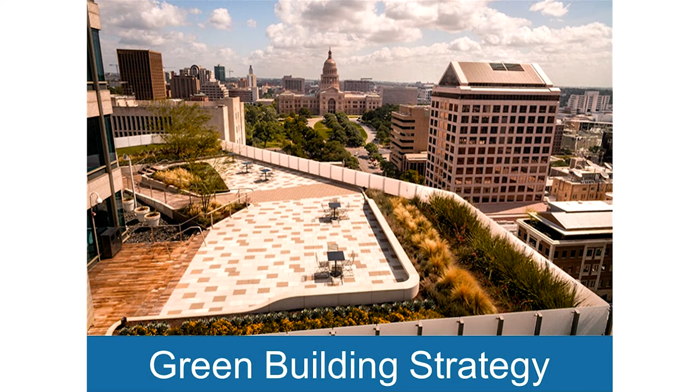So inside Austin, the biggest energy use is residential buildings, and within that, the biggest energy use is cooling. They have 1,800 cooling degree days in Austin. Around 50% of the buildings in Austin are detached, and the average energy intensity is 77 kilowatt hours per meter squared. So based on this info, we conducted a review of available strategies for green buildings, and we came up with our plan. So our plan has different recommendations for low-rise versus high-rise buildings, but common to both is a smart energy monitoring system. This has a lot of benefits, including automatic temperature regulation and letting the utility cycle ACs during peak demand. It also provides data to users, which helps them maybe shift their behavior.

Also common to all buildings is solar microgeneration. Austin is ideal for this. It has a warm, sunny climate. Solar microgeneration reduces line losses because it places the energy source directly at the home, and it also increases resilience. For low-rise buildings, we're also requiring all new buildings to have rainwater harvesting to take advantage of the large land area per person, and to have ductless heating and cooling, which we found to be more efficient on average. For high-rise buildings, we're mandating green roofs in all new construction to mitigate the urban heat island effect, and we're reducing parking requirements to have some benefits on the transportation infrastructure as well.

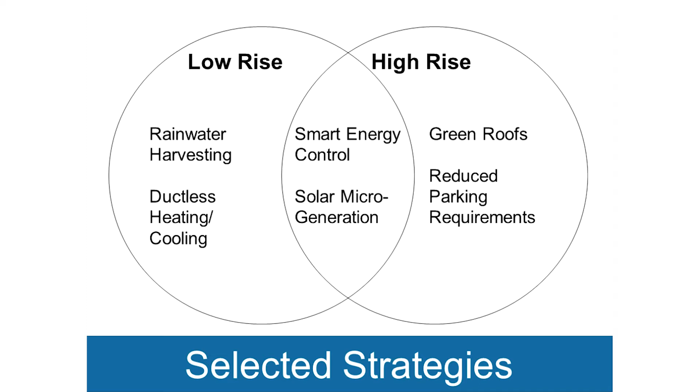So Austin is pretty unique. It's home to America's first green building code. We call it the Austin Energy Green Building Code. It's still updated today to meet best practices, and it's optimized for the local context. They also have an ordinance based on their building code that requires building audits whenever a house is sold. But our plan encourages people to expand that code to have regular energy audits for all houses. And we're also implementing policies that will demand any house found to have an above average energy use to lower the energy use to the average, or else pay a fine.

So the focus of our transportation policy is to really remove dependence on the automobile. Currently, Austin's auto mode share is well over 90%, which obviously isn't sustainable. We need synergy between the auto, transit, and active modes in order to create a sustainable transportation system. Transit mode share is currently at 4%, rather abysmal, and this is due to long bus headways and relatively limited access to higher modes of transit. There's BRT and commuter rail, but this only runs at peak hours.

The cycle network is incomplete, despite a relatively active cycle culture, particularly around the university downtown, and our plan addresses both of these issues. On the transit side, we'll be implementing a light rail system. Light rail is preferred to other modes because it offers no local emissions, as the trains are fully electric, and our energy plan is using no fossil fuels.

It's suitable for the density Austin has now and will be experiencing in the future. It has a strong image in that the transit vehicles travel on a dedicated right-of-way, and this will promote investment along transit corridors.

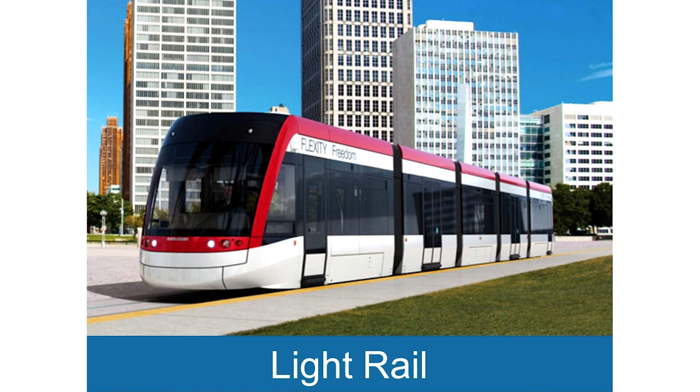We see the transit investment we're implementing as the single biggest reducer in VKTs from private vehicles. On the bicycle side, we hope to bring the lively bicycle culture that exists downtown to the rest of the city. We'll be implementing cycle tracks in the downtown core as well as residential areas so people have easy access to cycle infrastructure, and we'll be designing longer distance bicycle highways so people can make trips for longer distances.

Austin's climate is relatively mild year-round, so we see cycling as a potential game changer as far as transportation goes in this city. Finally, we recognize that despite the population growth the city is going to achieve, it's still going to be relatively low density, and this means it's not going to be walkable everywhere.

To supplement our transit system, our radical change is implementing a fleet of publicly owned shared autonomous electric vehicles. These will be subsidized by tolls on private vehicles and paid for as a pay-per-use model, similar to how Uber or car share works now.

We've seen some elasticity factors in the literature and have determined that in the year 2050, 95 million VKTs will be traveled by shared autonomous electric vehicles, compared to 60 million by private autos, which we see as a huge change.

Austin currently is dominated by single-family housing spread out all over the city, and our land use plan's main focus was to increase density everywhere. Our concept map gives an idea of this, with orange being medium-density housing and red being high-density housing. So you might notice we don't have any single-family housing left.

We've changed all single-family housing in the region to what we call medium density. The characteristic of this zoning is that all new dwellings must be multifamily in some way, shape, or form. At a minimum, this means they must be duplexes or have accessory dwelling units in the back or basement. We're also requiring interspersed green space and commercial space in these zones, while keeping everything at a maximum of 5 stories.

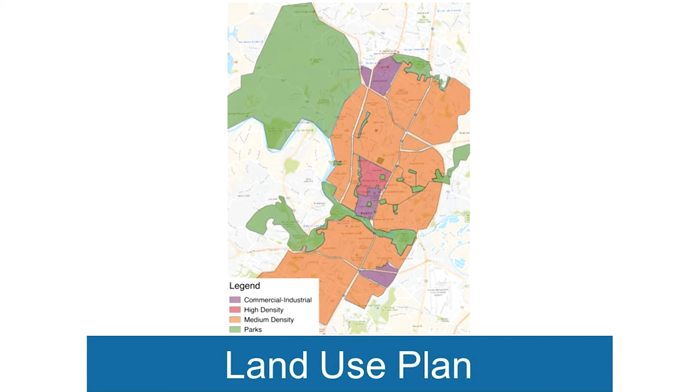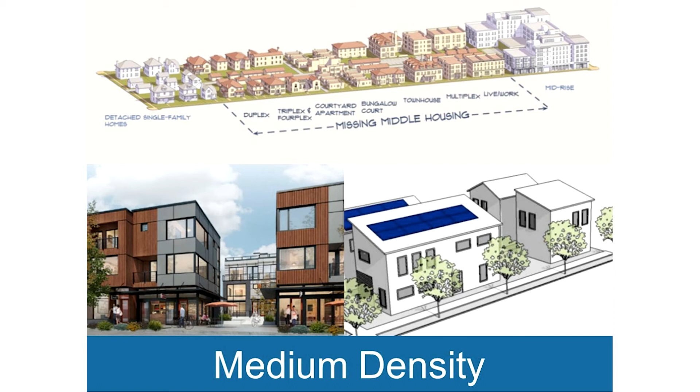To illustrate our design, we did a neighborhood design. We chose to do Colony Park, which is the biggest greenfield site left in Austin. It's kind of on the edge of the city.

The plan focuses on creating small neighborhoods separated by open space. The open space protects natural habitats. It also includes a regional park and wetlands and detention ponds to manage stormwater. Overall, the plan has 50% built-up area and 50% green space.

The transportation plan in our neighborhood follows from our transportation design. The main mode is LRTs, and you can see the big red dots. The neighborhood is served by 2 LRT stations, and most people are within a 15-minute walking distance to that.

The secondary mode is shared autonomous vehicles for local trips and trips to the LRT stations. That's served by those orange strips, which are pickup and drop-off areas, as well as the big orange square, which is a central charging area for the cars.

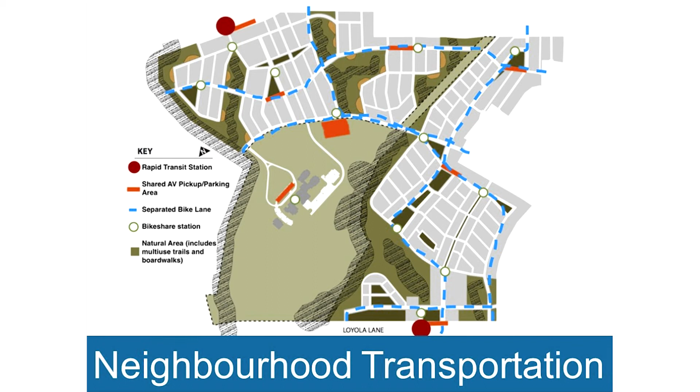The third mode is biking, with the blue dotted lines being bike tracks, separated lanes, and we also have bike share stations dispersed in the neighborhood. Finally, the neighborhood will be walkable, not only on the sidewalks, but also with boardwalks and multi-use trails in between the open areas to connect the different neighborhoods.

Energy remains a big challenge in Austin right now. Currently, over 80% of energy is sourced from fossil fuels, mostly coal, but with some natural gas in the mix.

In our sustainable plan, we see wind and solar microgeneration as the main factors that will contribute to a sustainable energy system. We see 1,500 megawatts per each of these sources, with wind being implemented at a more industrial scale and solar at the microgeneration level, like Ben talked about earlier.

In terms of emissions, there'll be no local emissions with wind and solar. However, when considering life cycle emissions, there will be 42 grams of CO2 equivalents per kilowatt hour, which is much better than the current 385 grams of CO2 per kilowatt hour.

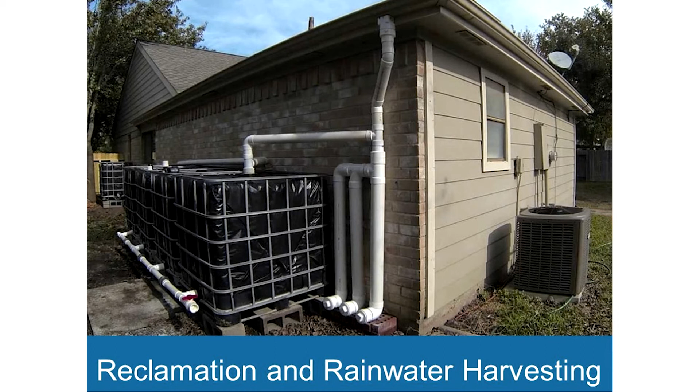In our plan, 35% of demand can be met with a combination of rainwater harvesting and water reclamation, but more importantly, we see an opportunity to construct no new water treatment facilities despite a massive population growth.

In terms of waste management, Austin is actually leading the United States as far as how aggressive they've been targeting waste diversion. They're on track to reach 90% diversion by 2050, and we will supplement their plan by adding a couple of different strategies. The first will be no single-use items in terms of consumer products and construction materials, which are the biggest source of non-recyclable waste in Austin. And finally, we will add free hazardous material pickups run by the city to make sure no hazardous waste gets into landfill and is disposed of properly.

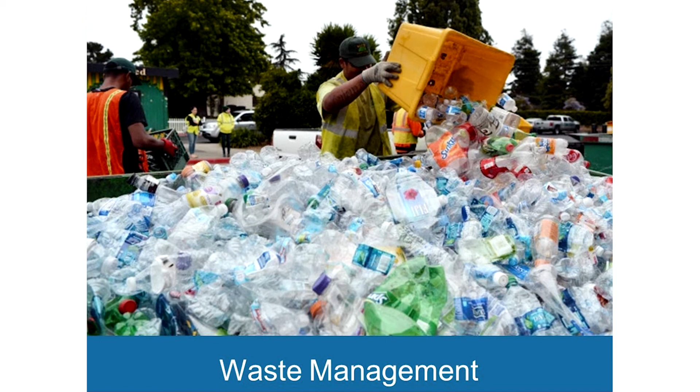We plan on increasing waste diversion to 95% compared to the 90% that is currently being achieved.

So when you take all the aspects of our design together, our plan actually leads to a 95% reduction in emissions from 2017 to 2050, which is pretty remarkable. The projected per capita emissions in 2050 are just half a ton per person, which is a lot less than what they are right now.

The main source of the reductions come from taking the grid and making it renewable. So all of our calculations were done with the life cycle emissions for solar and wind. So you can imagine if you use their current methodology, which doesn't account for life cycles, it would be a lot less.

The most dramatic reduction in emissions was in the transportation sector, and this came from banning all non-electric vehicles in 2050, as well as moving to a renewable grid. So everything is electric and everything is clean. This actually shows that right now, transportation doesn't use that much energy compared to the other sectors, but we use some of the most emission-intensive forms of energy for it, which is gasoline.

Residential building reductions come from both reducing demand as well as a cleaner supply. And it's interesting that even the non-residential buildings, even though we didn't actually design for that as part of the scope of this course, their reductions were really significant just from moving to a clean grid. We also have waste reductions, which stem from a large reduction in waste volume from our diversion plans.

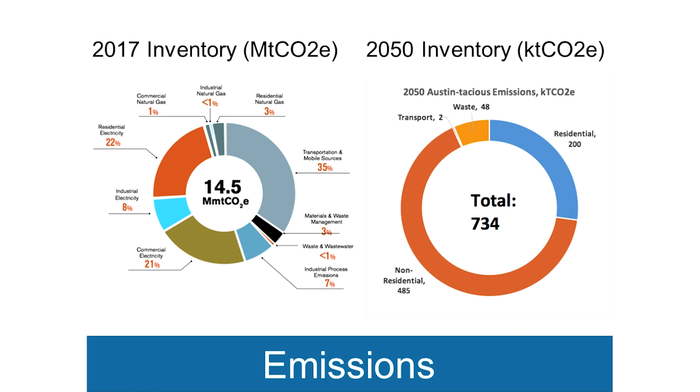When comparing our design to their targets, we actually beat their final 2050 target by half. So that is pretty encouraging. Their initial plan was to take that last 10% of emissions that they could reduce and use carbon offset. So we think that we can use that same plan for our 5% of leftover emissions, and so our plan can be considered carbon neutral.

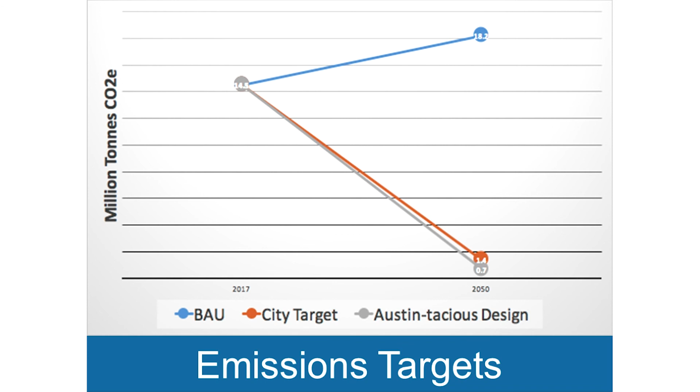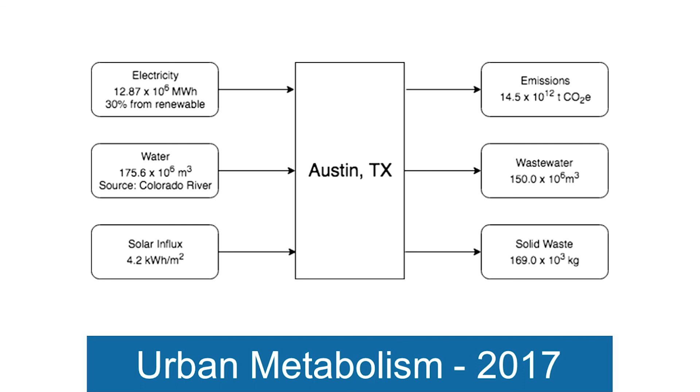When looking at the urban metabolism of Austin, you can see in 2017, most of the major flows are pretty linear, but our plan manages to achieve some meaningful circularity, most notably in water, as Daniel talked about, with 35% of water coming from reclamation and rainwater harvesting, and also in waste, with a 95% diversion rate.

In conclusion, our aggressive and Austin-tacious plan not only improves emissions and the urban metabolism, but it also improves the daily quality of life holistically, as measured by the Sustainable Development Goals number 11. Our plan increases access to transit, it lowers land use per person, it reduces particulate matter, and it provides more open space, all things that are part of this goal.

This is vital as more and more people move to cities, and for Austin especially, as it's primed to be a home to many climate refugees from Mexico as climate change progresses. So overall, there's very little doubt that our plan is anything but Austin-tacious.